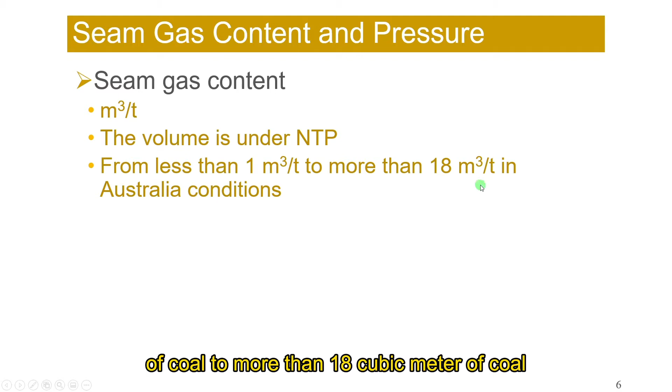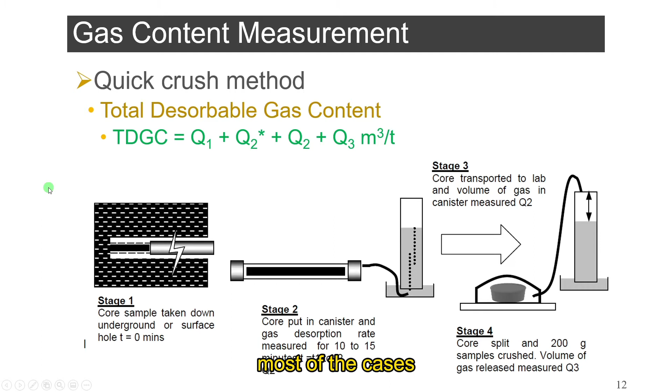In most cases, gas desorption is a slow process. In a longwall mining system, gas is continuously released to the longwall face from the time that the ground stresses on coal are released due to mining. This is a hazard, as methane is an explosive gas. The gas emission rate can be estimated if the coal production rate is known.

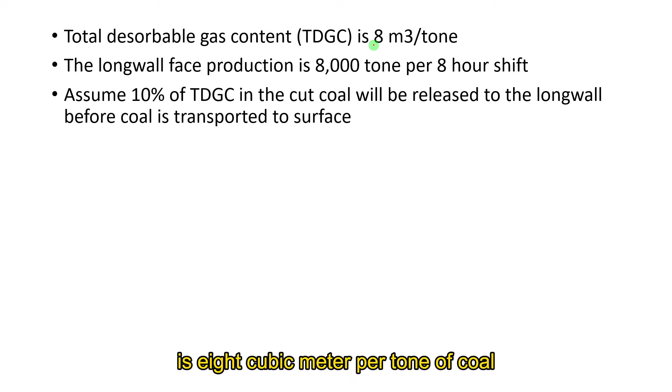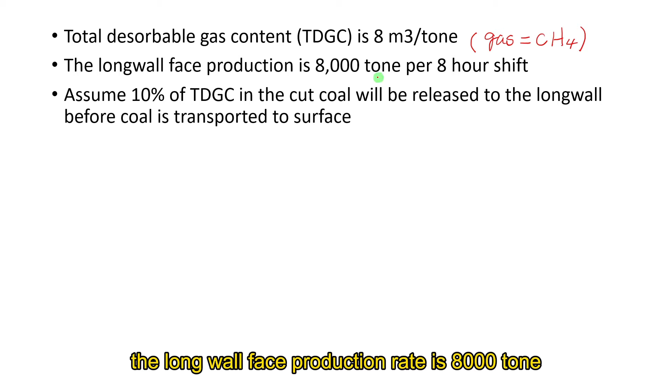For example, the total desorbable gas content, TDGC, is 8 cubic meters per ton of coal. For simplicity, we just assume all the gases are methane, so it is pure methane, although in most cases it's a mixture of CO2 and CH4. The longwall face production rate is 8,000 tons per 8-hour shift.

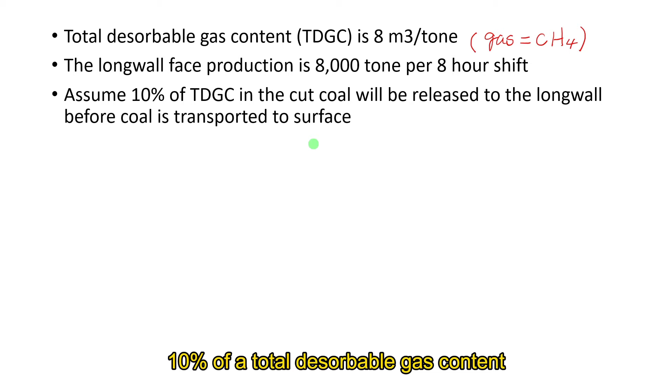Assume 10% of the total desorbable gas content in the cut coal will be released to the longwall before the coal is transported to the surface. This is because gas is released slowly, and once the coal is on the surface, it won't pose any hazard underground. So from the time the coal is cut to the time it is transported to the surface, in this problem we are assuming 10% of the total desorbable gas content is released underground.

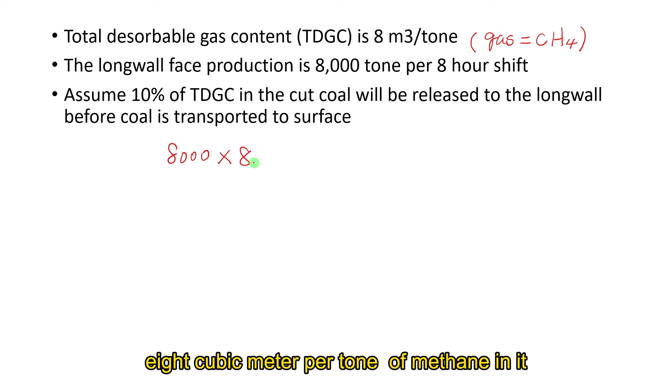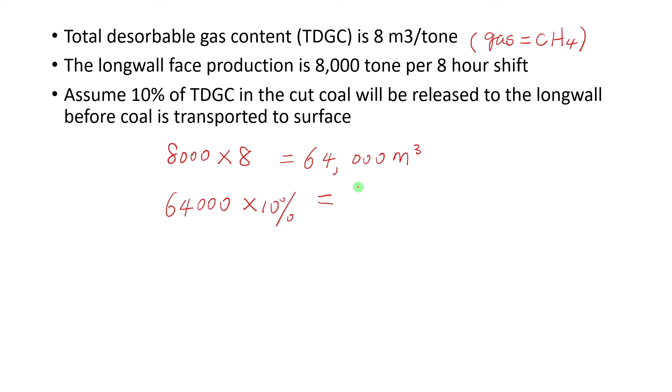So now we can calculate the methane release rate. We are producing 8,000 tons of coal per 8-hour shift, and within that coal there are 8 cubic meters per ton of methane. So the total amount of methane is 64,000 cubic meters. Out of that, 10% is released, so that is 6,400 cubic meters, emitted over a period of 8 hours.

Normally we convert it to seconds: 8 hours by 3,600 seconds per hour. That gives us 0.222 cubic meters per second. Normally we quantify the gas emission rate in liters per second, so that equals 222 liters per second.

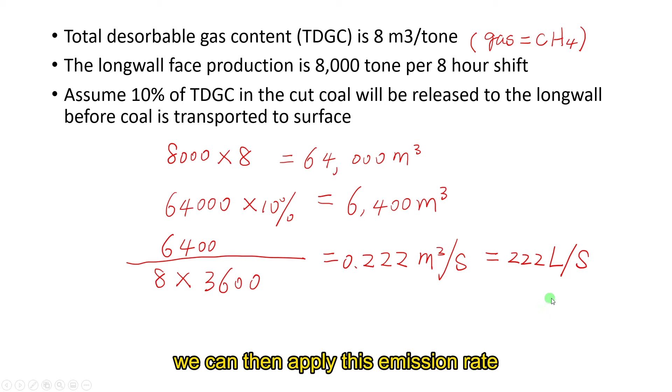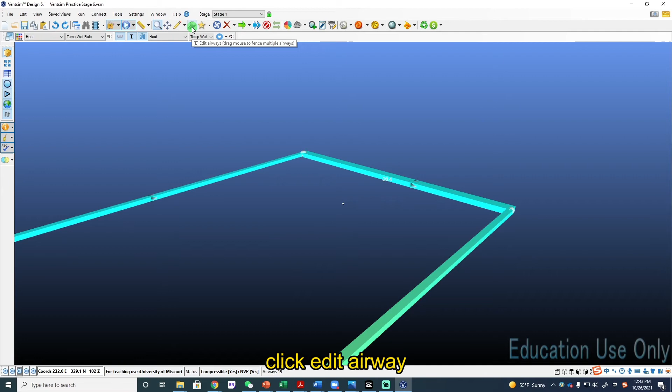We can then apply this emission rate to a VentSim model and simulate the concentration of that gas in an airway. If we assume here is a longwall face, we can apply the gas emission rate there. Go to that airway, click Edit Airway, click the airway where we want to apply the gas emission, click this gas icon, and from here I want to create a new gas mixture.

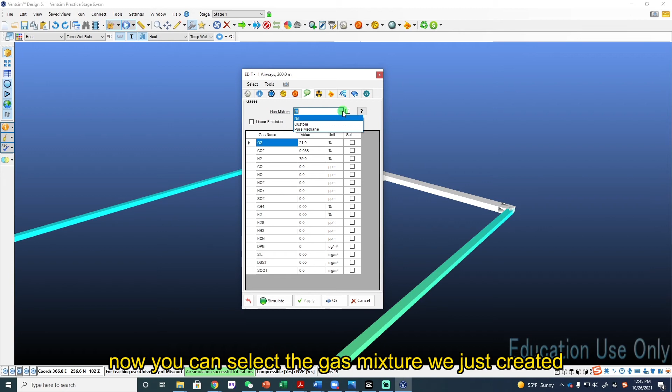I will just call this gas mixture pure methane, and it's going to be 100% methane. Depending on the real gas mixture concentrations, you can create different types of gas mixtures. In this example, we are just using pure methane. Click OK. Now you can select the gas mixture we just created, pure methane. From the calculation, the emission rate is 222 liters per second.

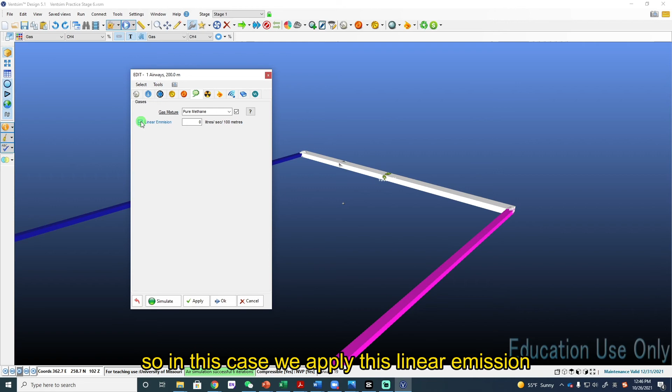Because the mining process goes back and forth, it is a linear emission, so in this case we apply linear emission. Sometimes it is a point emission; in that situation, you do not need to select linear emission. The unit here is liters per second per 100 meters.

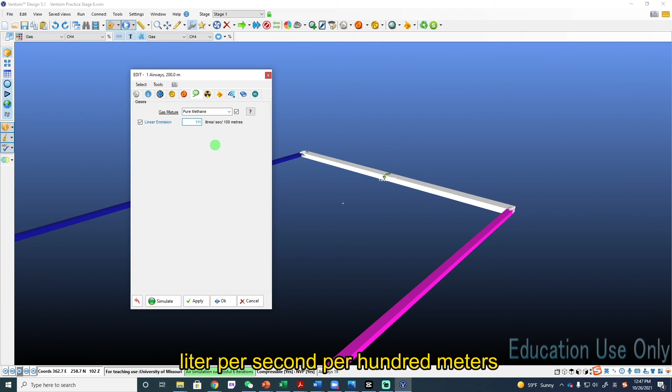The total rate is 222 liters per second, but this airway is 200 meters, so per 100 meters it is half of that. 222 divided by 2 is 111 liters per second per 100 meters. Apply and simulate.

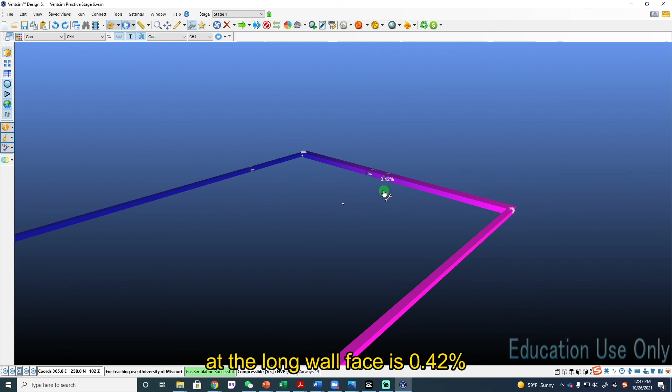Go here, select gas, and here, select CH4. Now you can see the methane concentration at the longwall face is 0.42%, which is okay, because as long as it's less than 1%, it is generally safe. If this concentration is too high, there are two ways you can reduce it.

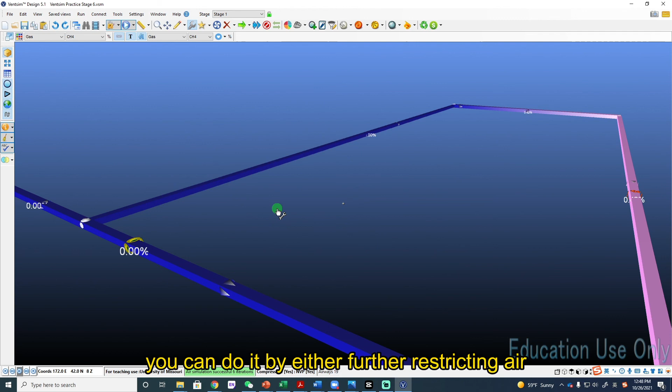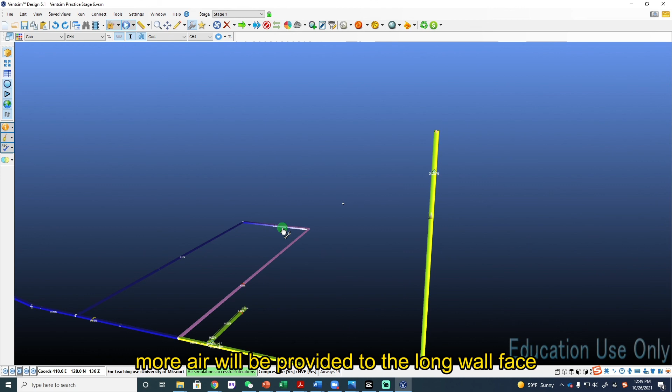Number one, you can increase the airflow at the longwall face. You can do it by further restricting air coming from this airway, so you push more air to the longwall face, or you can put a more powerful main fan on the surface, and as a result more air will be provided to the longwall face. Okay, that's the video for today.